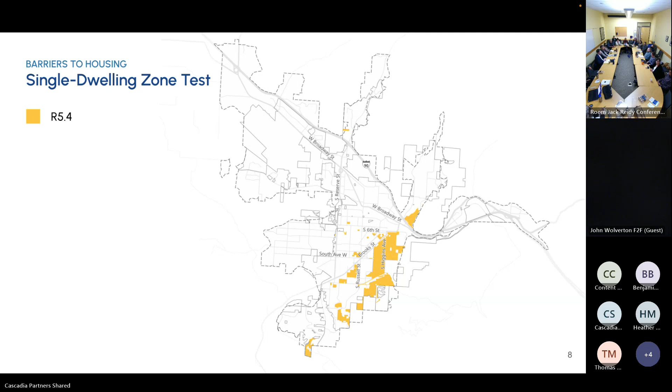Okay, let's get into it. So Stan's team has put together some really nice graphics, and this is part of their work on capturing the existing development patterns in Missoula and some ways to use these graphics to help illustrate what the code does and does not allow, and talk about these trade-offs. But this is kind of a graphic to illustrate a typical...

Single dwelling neighborhood. It varies quite a bit throughout the city and throughout the R5.4 zone. Some of them look a lot different than this, but this is somewhat typical in some parts of town. And so these lots are actually a little bit bigger than the minimum lot size, 5,400 square feet, but a lot of single level or maybe 1.5 story homes, 1,000 to 1,500 square foot homes. So this is pretty typical in a large part of the city.

So if we think about what kind of infill might happen, this is a context that the infill might happen in many places. And then the blue cubes that you see there are the illustration of what the zoning actually would allow. So this is the kind of envelope that the zoning standards say you can build within. So you could fill up a structure that fits within that envelope based on the setbacks and maximum height. You can see that a lot of the existing homes don't really maximize to that envelope - they're smaller.

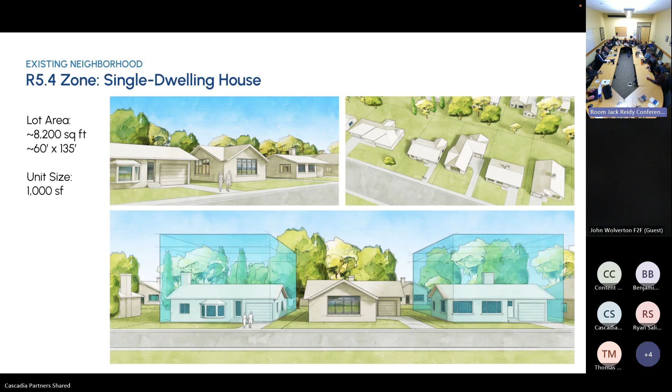And so coming back to this idea of the levers, what are the code standards that in our estimation would have the greatest impact on the kind of housing, potentially affordability of housing, in these single dwelling zones? These are the ones we identified as most important. The maximum number of units per lot - this is the requirement that we're going to be a single dwelling, so 1 unit per lot is the current standard. Minimum lot area per unit is 5,400 square feet, and that's a density regulation, so it affects how densely you can build. The height is effectively about 3 stories - that's what that envelope allows. Parking depends on the size of units, but it's generally for single dwelling 2 spaces per unit. The front and rear setbacks are about 20 feet, and then the side setbacks are 7.5 feet.

The circle, I mean, what is represented by where it is on this scale?

So we put it on the scale to show where we estimate that is relative to how high or low it is compared to other zones in the city and similar zones in other cities. It's not a science, but it's just to show you where we think there's room to go up or down on that lever.

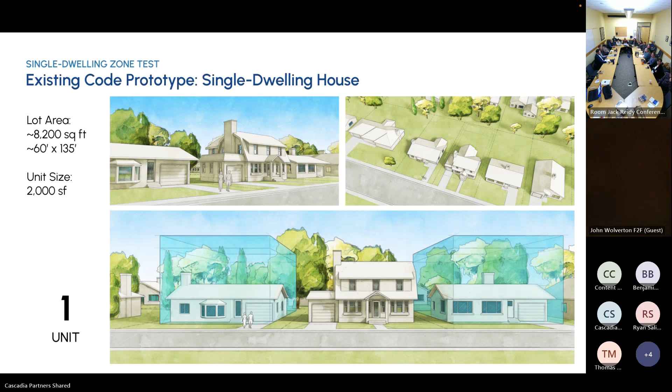And so here's where we start to run the financials of this to try to understand the potential affordability of that form of infill development. Looking at the cost of development, land and construction, and running that through a financial pro forma analysis...

We can estimate what price point a developer would need to yield in order for that project to be economically feasible, given a certain target financial return. They have to make money on the project, they have to cover their costs. What price do they need to hit in order for that to be economically viable to do?

And so for this infill of a single family house, we estimated that at about $680,000 for a for-sale, new single family house at this density for that unit size.

That's what that blue dot is showing you there, relating that to income levels in Missoula. And so you need to be earning about 240% of the AMI, the area median income for a four-person household, which is about 100,000 in Missoula, to afford a $680,000 house. So that's a relatively high income to afford that single-family house.

New single-family houses that are being built today may be coming under that. Some of them are over that. This is kind of one estimate, a wide range.

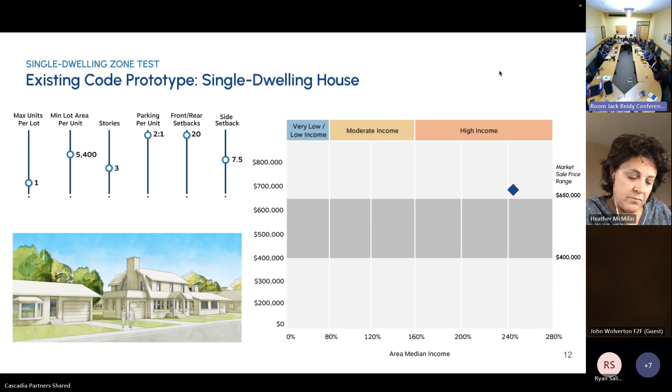You know, we can tweak along the way, but we are in a desperate place. One interesting thing to me is that when you look at those $680,000, $700,000 homes, what we've seen as agents is that if you open up an $800,000 home, somebody moves up from a $600,000 home, then somebody moves up from a $400,000 home, and just getting inventory in the market makes a huge difference for everybody along the line. So I think what we're seeing is we just don't have any housing.

I'll just weigh in and agree with everything that was just said. I'm not sure this is necessarily a toggle to add on single family, but it might be. I think we solved this already, but minimum unit size for the small homes - I know you have minimum lot area per unit, those pieces, but would that be something we'd want to consider in future zoning points, maybe even in the single family? I'd lean back on staff because I can't remember where we sit with minimum unit sizes.

Yeah, we don't have that. Okay, so Bozeman struggled with it and I just couldn't remember if I was conflating the two. So that's great. Heather, do you mean minimum or maximum?

Probably more... to try probably, a little of both. Think about it - if we don't have a minimum, then in Missoula it's okay, but a maximum, you're right, that ties more to the minimum lot area per unit calculations. It's a good question.

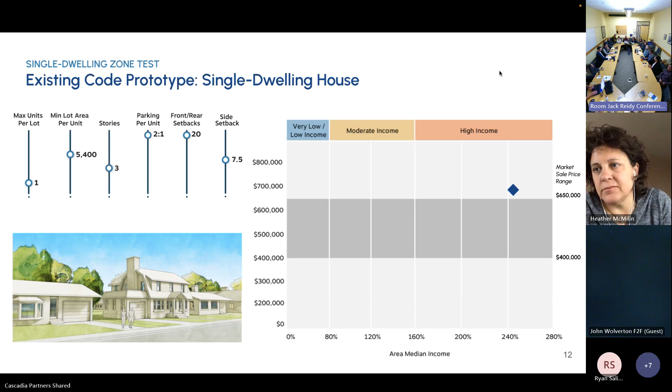Okay, so the last comment was really important relative to our next point. Because right now, the minimum lot area per unit is 5,400 square feet. That, relative to the height and the setbacks, is only speaking to the use - a single dwelling unit needs 5,400 square feet. Now, how big can that single unit be? Turns out it can be pretty big, right?

And so, the mansion that we were talking about - yeah, without any constraints, completely financially unconstrained, someone who has all the money in the world. There's nothing in the code that constrains the size of that single dwelling unit out of that 5,400 square feet.

I mean, there is, but the upper limit ends up being a house that folks in the neighborhood are probably going to notice the change. We have entire overlays developed around bigger homes. That's right - so you have responded to that phenomenon, but it doesn't apply everywhere. Other neighborhoods, some neighborhoods, it does. So it seems to have already been visited as a concern.

I think one of the things we do want to talk about is unit size, maybe maximum unit size. This is just part of the setup for that. In single dwelling units, residential neighborhoods, these are the kind of changes that are often the most controversial to manage. And these areas comprise most of the area of the city, so it's a very diffuse conversation.

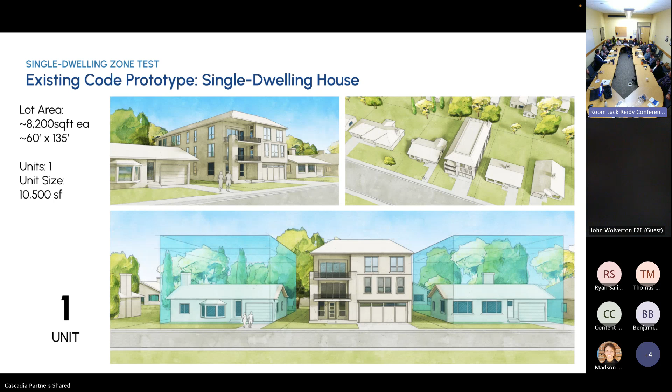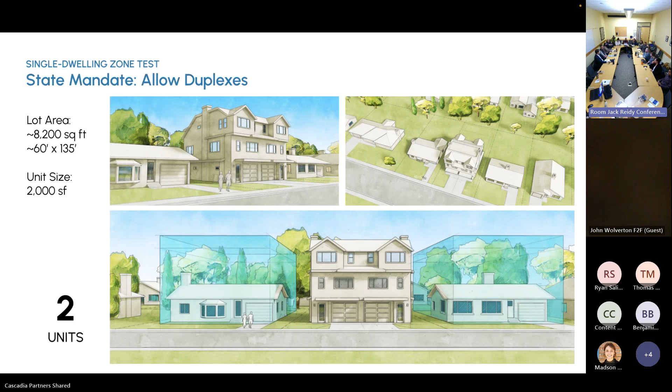When we run the numbers and try to estimate what's likely to happen, if you can't add more units, we generally assume the developer will build slightly larger units because larger units are more profitable. We don't reduce the unit size just because you're building more units, unless there's some other reason for the developer to do that. So then, if you model what is the affordability benefit of having those two units on that same size lot...

And I'm realizing the levers graphic here is off, so maybe just ignore that for a moment.

There's a small improvement in the minimum price point the developer needs to hit, mostly because if you assume the same land cost and get 2 units on that plot of land, the overall cost of development comes down a little bit. But you still have to pay for the construction hard cost of the building, and that doesn't change. I'm building the same size units as with a single dwelling house, that's 2,000 square feet. So many of the economics don't change much, but it makes it a little bit more feasible to deliver at a lower price point, and so there is a benefit there.

I think the price point we modeled here was about $615 for a new 2,000 square foot unit in a duplex.

A thought just came to my mind as we keep looking at the existing situation on the ground in this zoning in Missoula. Are there any vacant lots? Some of the older ones, maybe something is ready to be razed and redone, but in neighborhoods like Lewis and Clark, they're going to stay. So I thought, well, could they duplex by going up, putting another story? Well, most houses aren't built to withstand a second story. So what would be the opportunity to increase density in this zone in Missoula as it stands? It seems like it would be somewhat limited simply because there's already houses on all those lots.

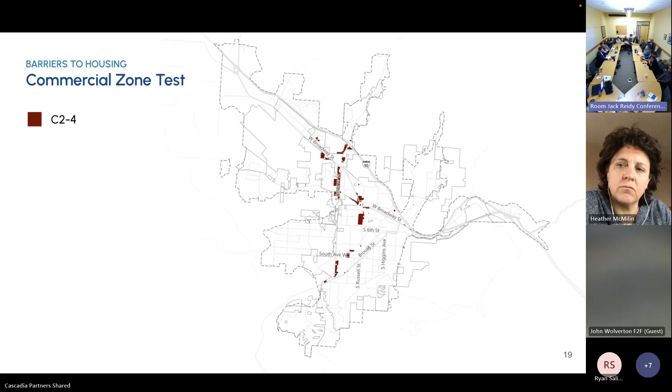It's a bit complicated how you can build housing and what set of zoning standards apply to housing in commercial zones, so this diagram tries to lay that out. The key distinction here is, today in Missoula, if you're building just apartments with no retail or commercial component, or if you're building a mixed use building that doesn't meet certain criteria for what the code defines as a vertical mixed use building, then any of those—a single purpose residential or mixed use building—is basically subject to the same standards that regulate multifamily development in the multi-dwelling zones.

The key to those standards that we covered, if you remember, we did some tests on the multi-dwelling zones in the RM1-45 zone in the last meeting. One of the most important standards there is the density limit at 1 unit per 1,000 square feet, and that's what we found to be one of the most important in combination with minimum parking requirements.

Jamie, can I just jump in with a quick summary of how the zoning works within the business and commercial districts, for those who don't know? The RM1 zoning district is our high density residential district and it allows for multi-dwelling buildings—apartment buildings or 3 or more units in a building. A single purpose residential building is just dwelling, just apartments or units, versus mixed use, which has some commercial component. The way our business and commercial zoning districts work in town is that they allow for more commercial uses, but they also allow for anything that's allowed in that RM1 zoning district, which has that high density multi-dwelling use as well. I just wanted to clarify that.

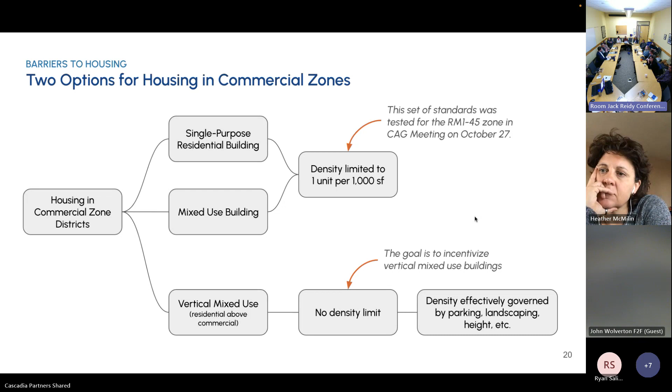So we wanted to test the vertical mixed use scenario because that's what the code is kind of privileging now. But we also already know some standards from the tests we ran on the multi-dwelling zones.

So here are the key levers in those C2 zones: in addition to height or stories, there's the minimum amount of commercial space that's required.

Today, if you're eligible to be considered a vertical mixed use building, you need to provide commercial space equal to at least 20% of the area of the site. So for a 10,000 square foot site, you have to have at least 2,000 square feet of retail or commercial space on the ground floor of the building. And then you also have to provide parking for that commercial space.

The amount of parking you have to provide depends on the specific use, but generally it falls somewhere in the range we've estimated here, about one parking space for every 480 square feet of commercial space.

Then you have to provide parking for the residential units as well. The lot area per unit isn't actually eligible or applicable here, but we wanted to show it to give you a sense of how different it is from what you'd get with a single purpose residential building. Lastly, landscaping does affect things a little bit—it's 15% of the site. There are no setbacks in the commercial zone, so those don't really play a role, but the landscaping does.

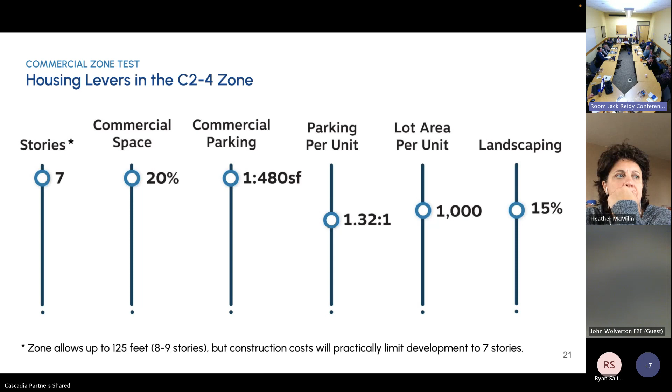So if we apply the existing code, this is the kind of typical building we'd likely see in some places in Missoula in the commercial zone.

The key thing here is we're assuming this building just has surface parking. If you assume structured or underground parking, you could go higher and get more units potentially, but that's also more expensive, and many developers have found it prohibitively expensive. So we start with the assumption: what could you do if you just did surface parking? It's about 30 units you can fit in this 4-story building, and you're required to provide about 6,000 square feet of commercial space on that ground floor.

Where is the parking in that picture? Is it those little squares? Yeah, it's around it. Oh, so that's a street in between the two. Okay, I get you. Yes, the division—the street is there, we're viewing the building from the street.

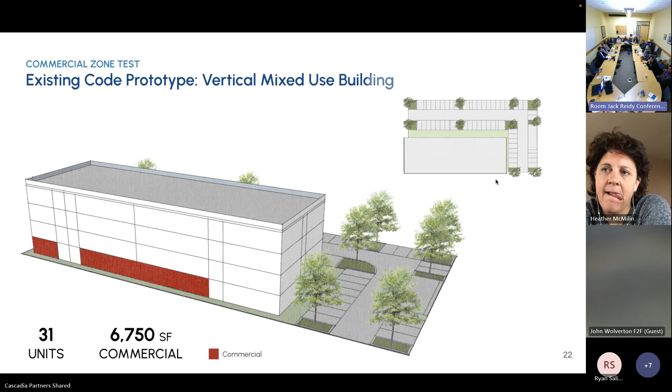So how does that perform on relative affordability? I think relative to the multi-dwelling zones, it's actually a bit worse. Part of the reason is you're getting about the same density as those zones, but you have to provide that commercial space on the ground floor, and at the rents we're assuming for the commercial space, it actually has a negative impact overall on the feasibility of the project.

It's potential that you could get some pretty high rent tenants, and that would be more attractive for a project. But what we're seeing and hearing from developers, and what we've seen in the market, is that the commercial space can be hard to lease up, with worries about it sitting vacant if they can't find the right tenants. The rents haven't really kept up with the construction costs of providing that space, so it's kind of a drag on the overall feasibility of a project.

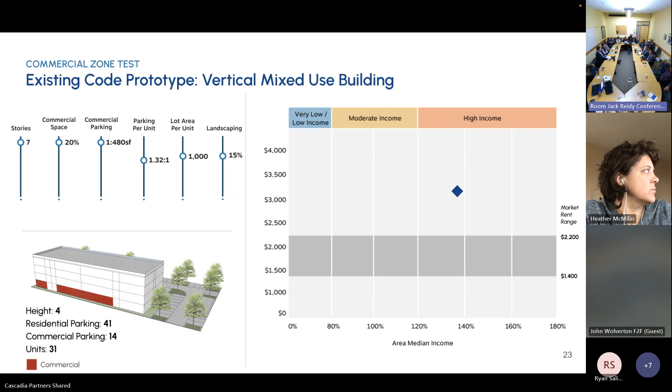Does this scenario assume a reduction in lot size per unit? Well, because it's vertical mixed use, it doesn't apply. But you modeled it on the prior slide at 1,000 units, or are you just showing it at 1,000? It's not required to be 1,000, but that's kind of where it ends up if you have surface parking. So it reduces slightly as parking goes down, and you can get that higher density.

The interesting thing here is how much commercial space is required, and how much parking is required for that commercial space. And then there's an even bigger picture question: should commercial space be required to build at this higher density? That's a big policy question we want to pose about housing in commercial corridors, but that's really the remaining lever here, in addition to going further down on parking for residential.

So we're still only at one space per unit. There may be developers in certain locations, targeting certain kinds of households, that would potentially respond to having parking below one space per unit. They could get more units, and that would reduce the minimum price point they need to get for each unit. So there's an affordability benefit to going lower. It's not clear how many developers would go lower, but I think it's on the table as a lever that could make a difference.

So we wanted to also show the scenario if you applied those state reductions in parking, and then also tried to build the structured parking garage instead of surface. You can see the difference as we toggle back and forth: with surface parking you get maxed out at 4 stories. If you do structured parking, you can get 4 stories on top of 2 levels of structured parking. We assume this is above-ground structured parking, which I believe is slightly less expensive than underground, but some might find a combination of underground and above ground works. Either way, the construction cost for both the parking spaces and the building itself is more expensive due to building code requirements as you go higher.

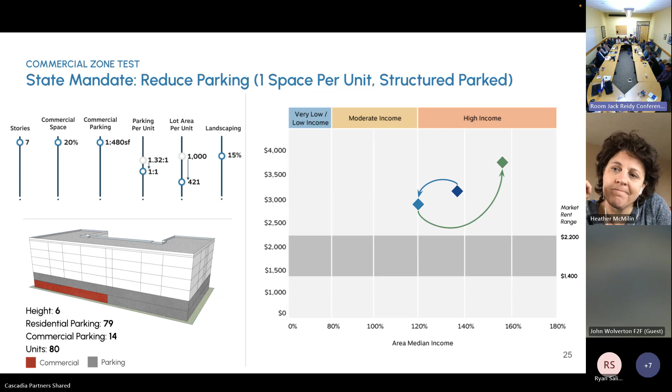Well, I think there are pieces in other legislation that have been passed that signal a continuing strong desire from the legislature that we incentivize, but not mandate. So I think it's only carrot, not stick, right? Yeah, I think we'll continue to move in that direction.

So, I have a question about this, maybe something for this group to understand a little more and think about as we move ahead. When we talked about the implications on the residential side, on the modeling for the residential district, when it came to thinking about what the growth policy considerations are, do you see those questions as being uniformly for the city at large, or is there a piece of where this is going where there are different contexts where these levers might be adjusted differently, whether based on the place type or other ways of looking at how this gets applied to specific areas in the city we're looking at?

Yeah, was that a question for us? I think I'm putting that together. Is this kind of brought over into the place type approach as a way to construct those and figure out what they mean?

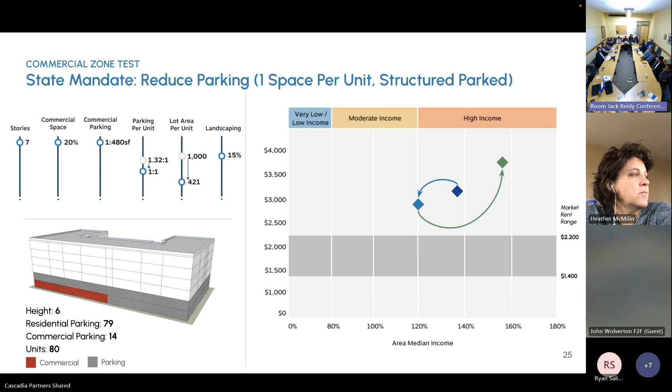Was there anything else before that we wanted to close out with? I don't think so. I think maybe for next time we'll send out these slides and ponder these questions more related to the commercial corridors, which is kind of how do we essentially balance this opportunity for more housing and higher density housing in places where there's probably a lot of capacity for infill and opportunity for a lot of new development.

But also there's a desire for there to be some commercial. Commercial zones are supposed to have some commercial uses. So think about where in the city we should be prioritizing commercial uses, and where maybe we should be a little more flexible about having higher density residential. Right now it's a pretty universal set of standards that everywhere there's a commercial zone, it's primarily wanting commercial development only. Can we be a little more flexible on that to try to accommodate more housing? That's the main question we have.